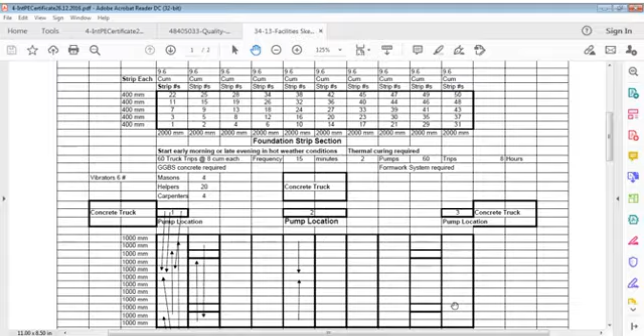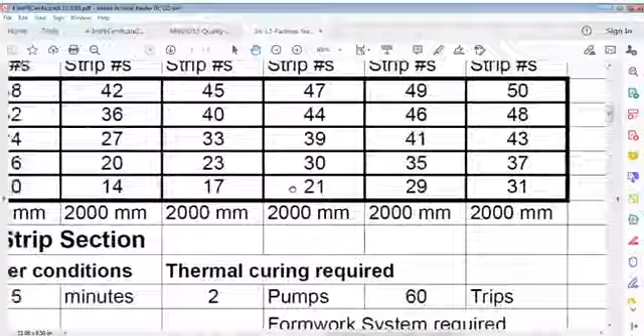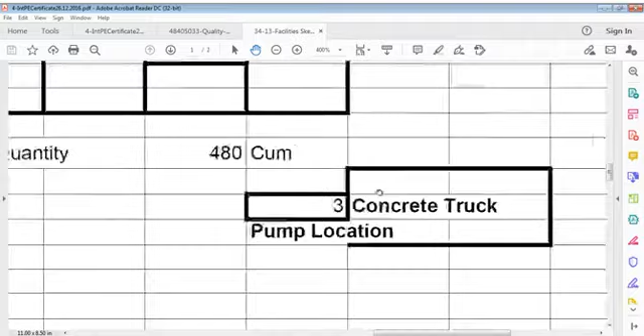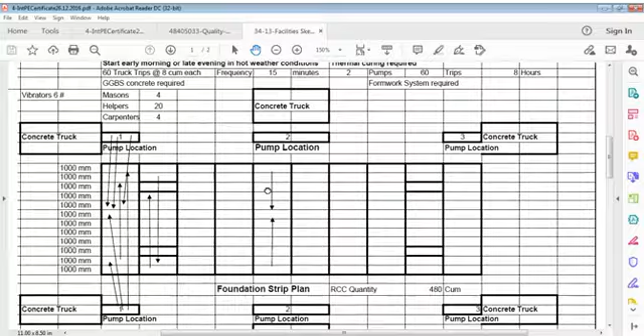Engineering is engineering. We cannot run away from that. Engineering means we have to move fast. We have to move fast with good planning, not only planning but good of everything. We have to deliver. We cannot take everything for granted. And civil engineering in particular is such a field where speed matters, and if speed matters, quality also matters.

This event or activity which is planned, that you are looking at, is only one activity, and that's part only. It is not even the complete foundation, but only the pour of the foundation. Not for formwork, not for steel fixing, not for something else. This proposal is just an indicator of how you can do it. It's just a guide, though it's based on complete thought, complete contemplation. Keeping in mind what's happening or would be happening on site, we evolve something like this, not only for this activity, for every such activity.

Thoughts are important. If you are experienced, thoughts are very important. In fact, thoughts become methods, and methods become technologies. Usually people call it methodology, but I do not call it methodology. I simply call such writing, such pages, such thoughts our own language, a language like drawing. We create such pages for everybody, provided one reads. And that's what engineering is all about: to learn to do it the best way.

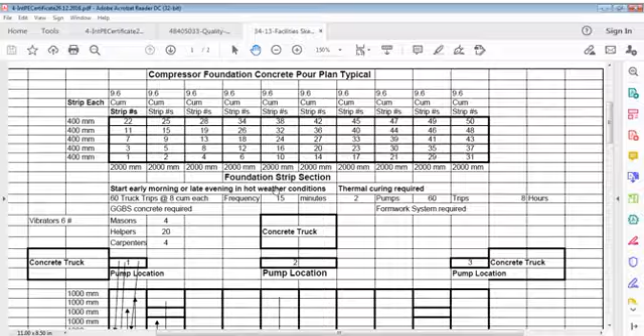Okay, we come back to this and we have to understand this well. A heavy foundation everywhere needs to be planned properly, because it is heavy concrete, sometimes many hundred cubic meters. I still remember a case where I poured a cracking gas compressor foundation, which was 400 cubic meters. 400 cubic meters is not a small quantity for one object, one element, or one machine.

How much heat does it give? Can you calculate? Can you even imagine what it evolves and what type of specifications we have to use in such foundations? That is a heavy machine foundation. Even in some building, you design a raft because of weak soil. You do not go to such an extent of foundation.

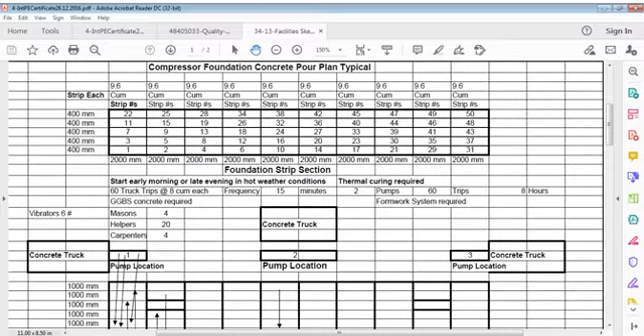I think it's still on, maybe. So I continue with this talk.

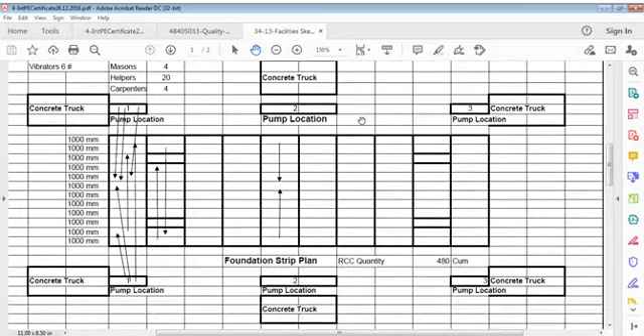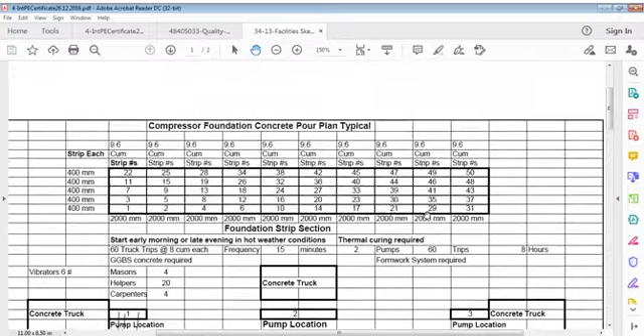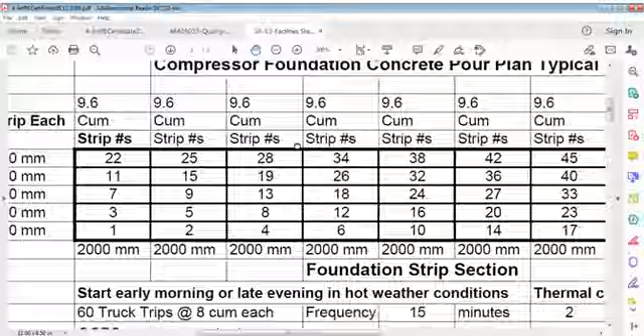This is a foundation. Don't worry about the title. This is a heavy foundation and it has about 480 cubic meters. It may look like much more, but it's a very small size. You can see here a 480 cubic meter foundation, and this is the plan for how to pour it. You can see only the pour plan, the concrete pour plan. This is the foundation concrete pour plan.

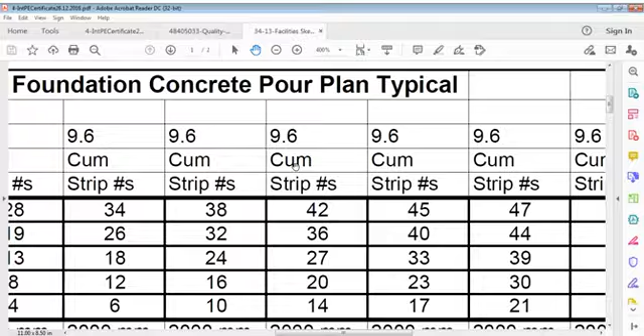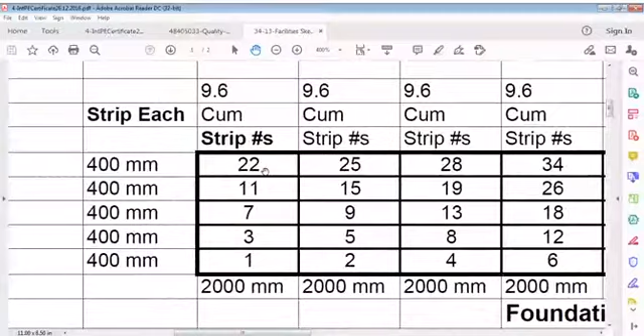It requires complete knowledge of how you can do it. It's not that you simply do it at random. You must have total vision of the procedure. If you don't have that, you can't plan it. If you don't have experience, you can't plan it. You see, quantities are approximately given. Thickness of strip is given, depth of foundation is given, strip width is given, and strip length is given.

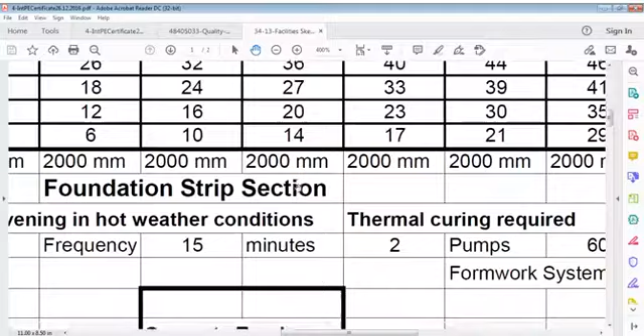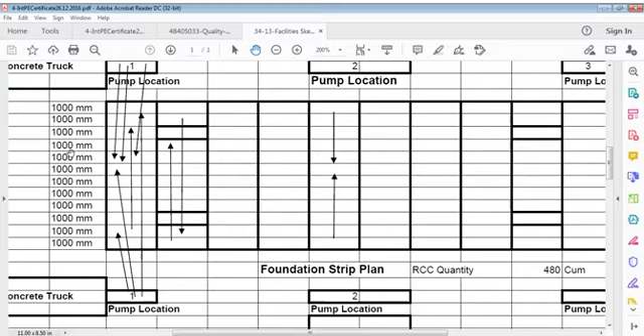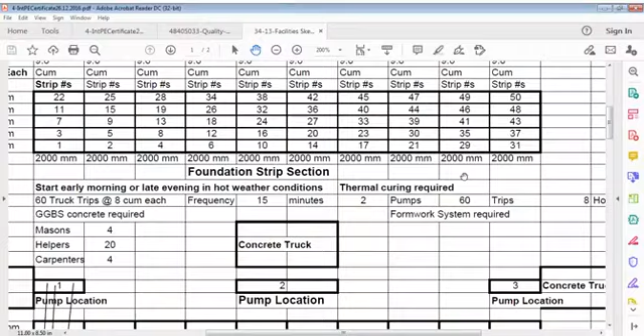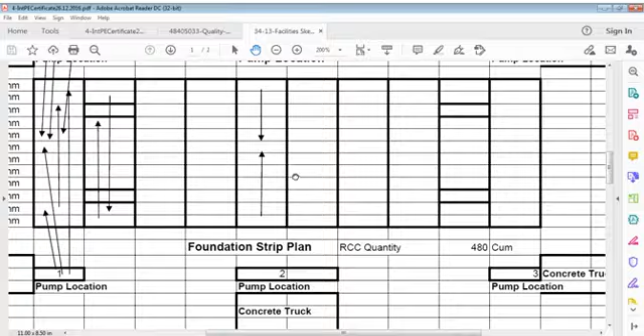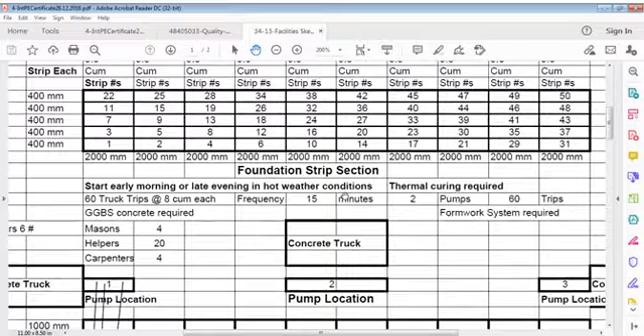It's not ordinary. It's neither an ordinary nor thin nor thick element, but it's massive. Believe me, it's not mass. Don't confuse yourself. I'm not talking of mass concrete. I'm talking of a massive block, a block which involves high quantity and high quality concrete. High quality in the sense that you're not going to use ordinary cement for this. Ordinary cement doesn't work for such a block, because there could be tremendous cracking, and because ordinary cement is rapid setting, it cannot be called qualitatively suitable for such a concrete quantity. This only gives the procedure, not the technicalities, but I'm sharing with you why it is done.

If you have experience in concrete and in construction of such foundations, like a raft foundation: if it's more than 1 meter thick, or more than 80 centimeters thick, we can say yes, it's actually a raft, a thick raft. The dimension is massive, but it's a machine foundation because the design is that way. It's not what we design for ordinary footings. It's a different kind, an extraordinary footing.

We have to control quantity, cement percentages, dimensions, speed, temperature, shrinkage, and curing. Hardly any provision or requirement is left uncontrolled, not only during pouring but also post-pour. In this case, because the quantity is much more than ordinary, I'll think of how to push it for a slow setting arrangement, not rapid setting.

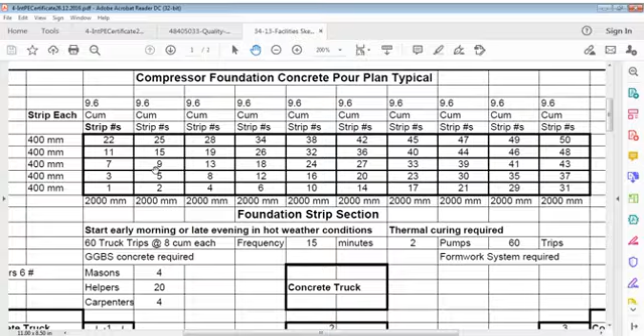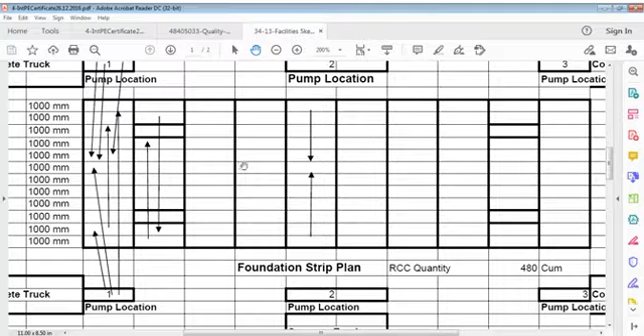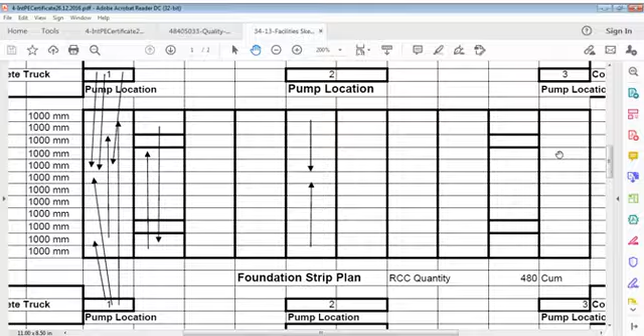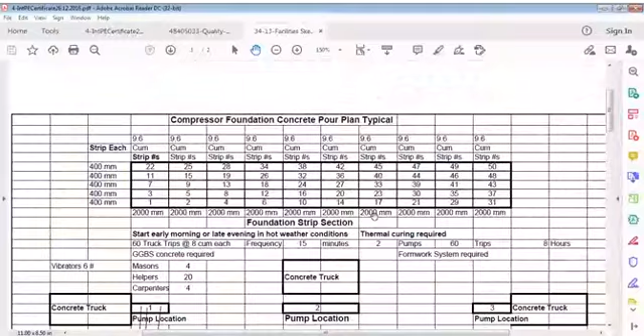The thickness, 400, 400, is also laying thickness, not element thickness. It's just a measurement for evaluation and planning purposes. If this foundation is 12 meters by 20 meters, all these strips are only for indication, not measurement. So if it is 10 parts here and 5 parts here, it's 50. That's what is important here, because of shutters, and this is where professional action is needed. Only for the purpose of the pour.

Not to allow any cold joint in various layers in concrete: cold joints do not work properly. They do not allow concrete to work properly. There is no good bonding within the concrete itself, and there is no uniformity. Some part is set, some part doesn't start setting, and other parts... that's complete confusion, maximum ambiguity. We have to take that out from our minds.

So this is what we plan, we do, we check, and we improve it. Layer by layer we go. It's just an indicator; you can change the sequences of these numbers. There's no hard and fast rule. But the rule is that every layer and following layer, and every other layer to come either horizontally or vertically with that layer, should be hot jointed layers, because in concrete cold joints cannot be accepted. Hot joints are actually more important.

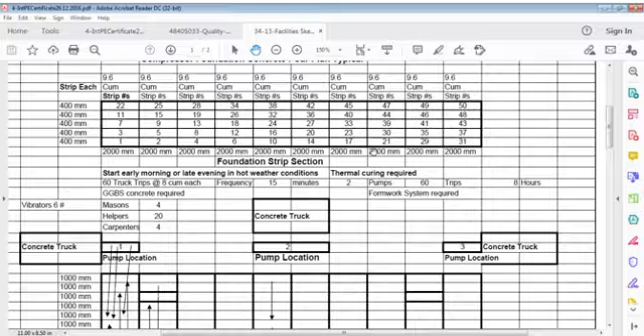For this, we have to schedule steps as well. So start early morning or late evening in hot weather conditions. Thermal curing required. So it says 60 trucks, trips of 8 cubic meters each. Frequency is 15 minutes, thermal curing is required, of course, and 2 pumps are required. 60 trips total.

This strip planning can be done for whatever foundations you have, not only massive blocks; you can do it for other items also. You have to show where pumps will be located, where trucks will stand, what your access to site is, and how strips shall be poured. You must be ready with answers if somebody raises a question. After all, this is public. Yes.

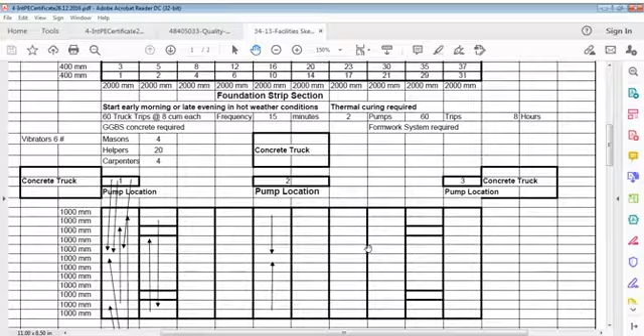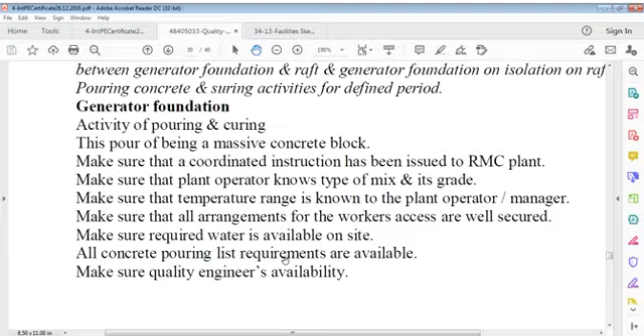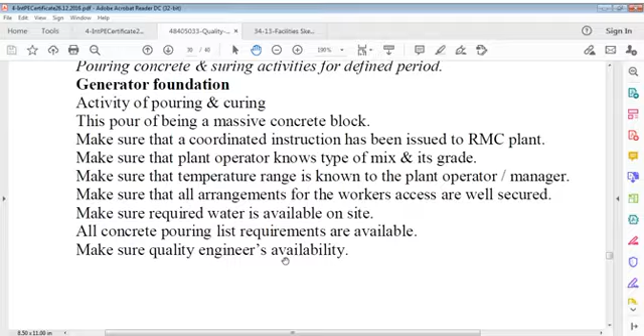So what we said in generator foundation, let us say generator foundation, we actually said this was something. It's an important activity of pouring and curing. So it says this pour being a massive concrete block, coordinate, make sure that coordinated instructions are being issued. All we have to do: temperatures, elements, etc. We have to go through that.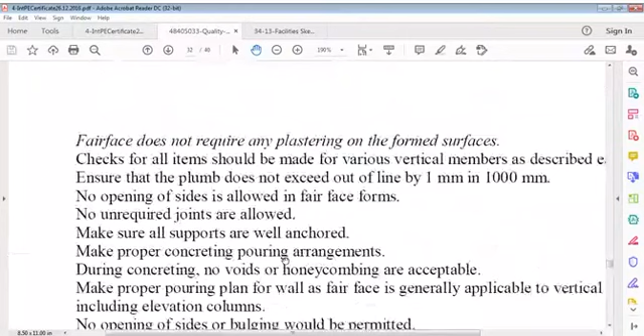Fair face concrete is also a very important part. Fair face concrete, all items should be made for various vertical members as described earlier, and ensure that plumb doesn't exceed; out of line is 1 millimeter in 1000 mm. No opening of sides allowed in fair face. No opening of sides allowed.

And you can say unrequired joints aren't allowed. Make sure all supports are well anchored. Make proper concreting pouring arrangements. During concreting, no voids or honeycombing are acceptable. This is a very important point, no voids also, because these voids can only do

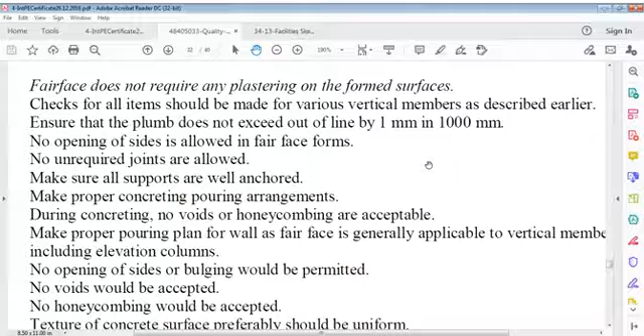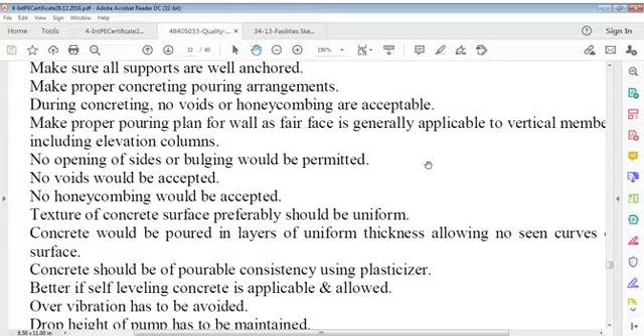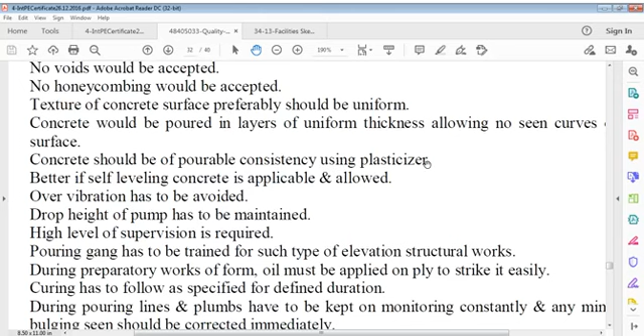You can say that concrete would be poured in layers of uniform thickness, allowing no seam on the surface. No honeycomb will be accepted in fair face. Concrete should be pourable consistency using plasticizer. Better if self-leveling concrete is applicable, although very expensive. Over-vibration has to be avoided. Drop height of pumps to be maintained.

Then a high level of supervision is required. The pouring gang has to be trained for such type of elevation structural works. During preparatory works, form oil must be applied on ply to... Now curing has to follow as specified, and during pouring the lines and plumb have to be kept monitored constantly, and bulging seen should be corrected immediately.

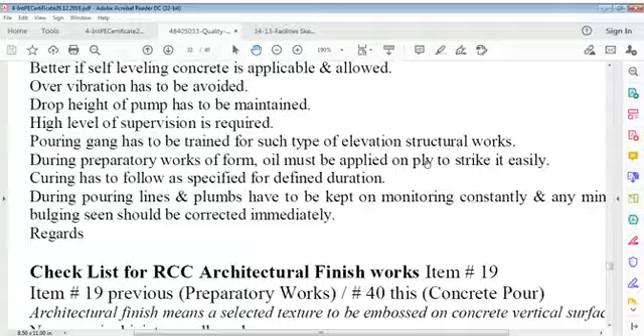So this is architectural finish, same except pattern on the surface of both side elevations. Some kind of architecture we have to do. The plank surface or some other surface. Generally planks are used because planks are rough, and made completely joint free; no leakage is accepted.

It's a difficult job, but what to do? I have to do it. Difficult or not difficult, we are supposed to do it, no way out. So these are quality

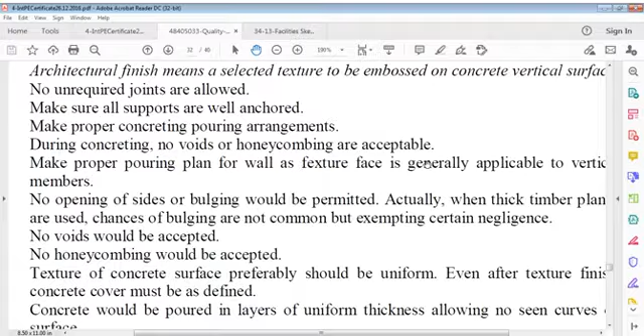hourdi slab, and before hourdi slab we might have these voids in block, different shapes of block, trapezoidal. As we discussed last time, of hourdi, this thing was also discussed. No, it is a completely different word here. We deal with hourdi. How do you call it? H-O-U-R-D-Y. Hourdy.

In this, beams exist that are seen and not seen. Soffit is one level, plain soffit, and plaster is there because of different materials. You see the hourdi surface, then you see plain surface. Hourdi block is rough, of course, it's a concrete block, and plastering is easy, formwork is easy, because there are no drop beams in this. When beams are formed in hourdi on the site itself,

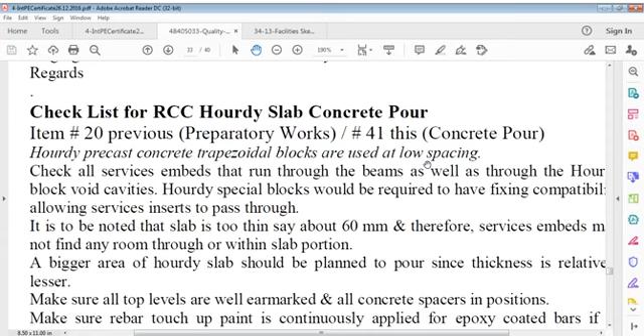Thickness of slab excluding this hourdy is 60 millimeters, 60 mm generally, maybe more, but this is very thin. In this we will place everything. It's to be noted that the slab is too thin, say 60 mm, therefore services embed in it.

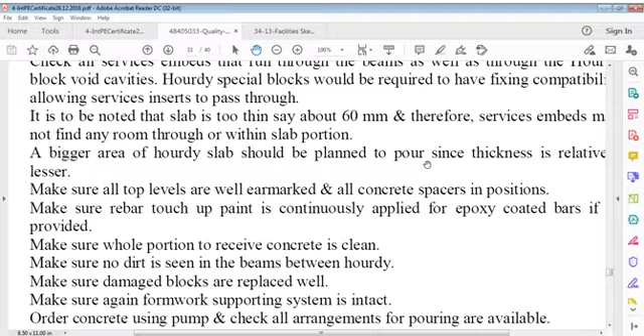You cannot find any room through or within the slab portion. The bigger area of the hourdy slab should be planned to pour since thickness is relatively lesser. All top levels are well earmarked and all concrete spacers in positions.

Rebar touch up paint is continuously applied, epoxy coated. The whole portion to receive concrete is clean. No dirt is seen in beams between hourdy. Damaged blocks are replaced well; you can't use damaged blocks in this.

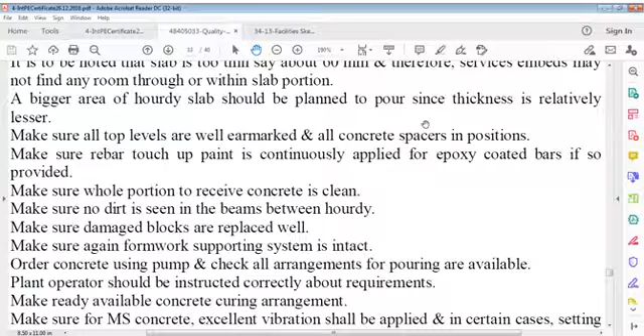Make sure again formwork supporting system is intact. Ordering concrete using pump, check all arrangements for pouring are available. The plant operator should be instructed correctly about requirements. Make ready available concrete curing arrangement.

For MS concrete, excellent vibration shall be applied. MS means microsilica concrete; excellent vibration shall be applied. In certain cases, setting time will start delayed by many hours.

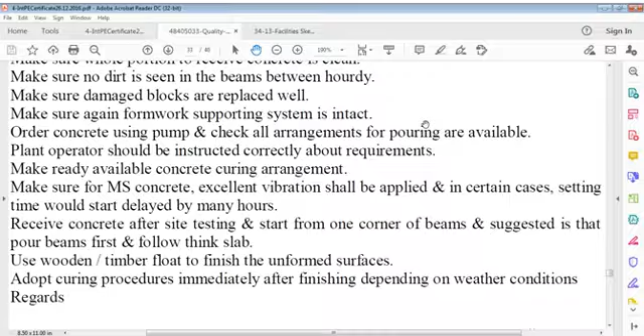Receive concrete after site testing and start from one corner of beams. It's suggested to pour beam first, followed by thin slab. Use wooden timber float to finish unformed surfaces. Adopt curing procedure immediately after finishing, depending on weather conditions.

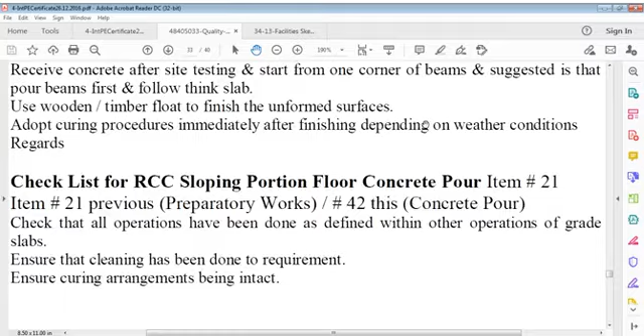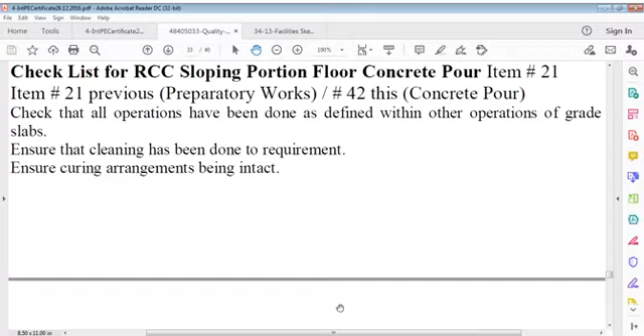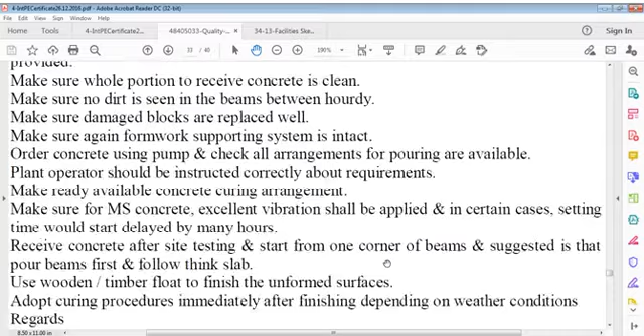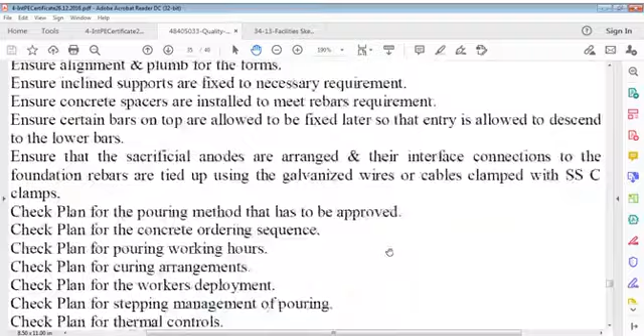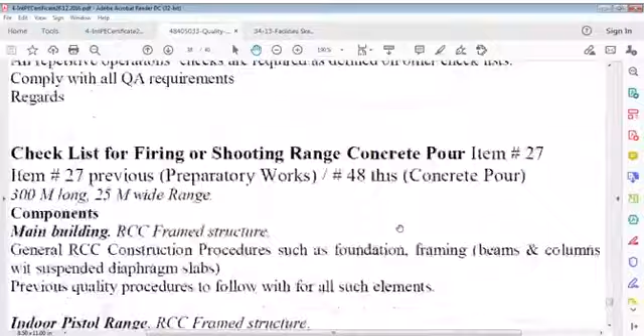Meanwhile, I'm going to close this now because it was thought of to do it faster, but my backing is not ready.

I should say pouring is a very important activity, because I've seen such rubbish pours. I've seen very bad posts, photos on Facebook and others. Really, sometimes you burn yourself looking at such results - results which are not digestible.

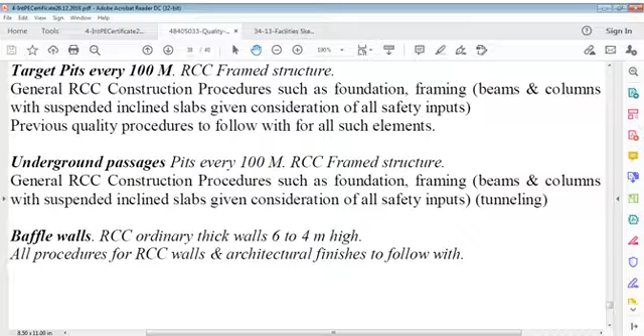As an engineer, you cannot digest such bad acts, bad works - not acceptable to anybody. It's not that I or you or someone else; you burn sometimes yourself seeing such acts. Really, that's worrisome.

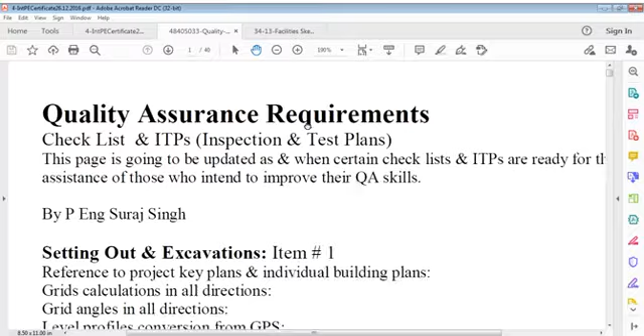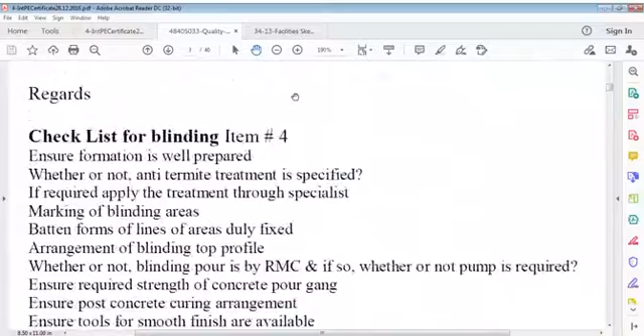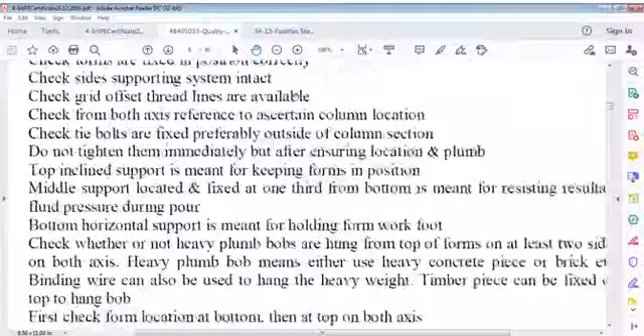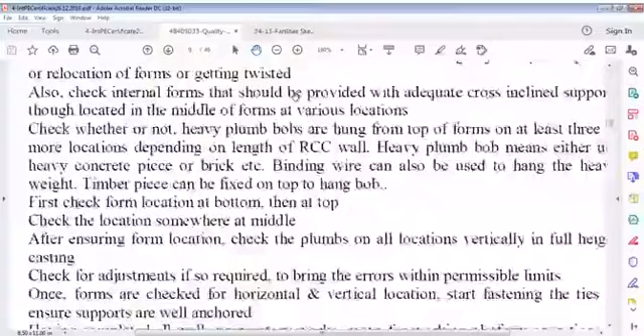It happens, but the only way is to improve. And if we can't improve, what can be said about that? If we can't improve, what to do? Improvement is improvement - if we don't improve, who shall improve? It's engineering work; only engineers should think how to improve quality so that designs are properly delivered.

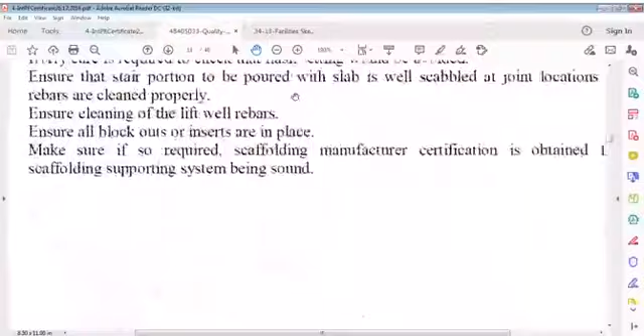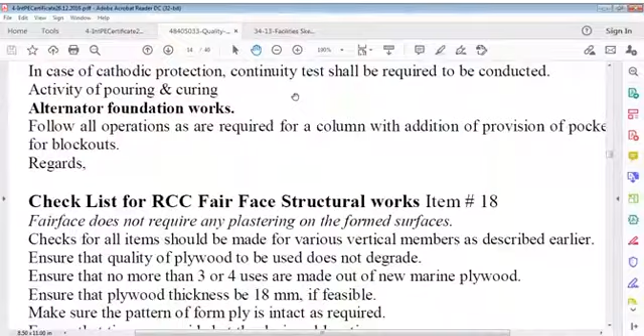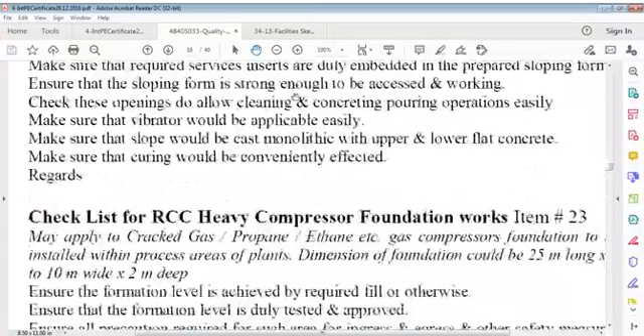And if you say no, I think that won't work - I have to be very clear about this issue. It's not an issue alone, it's a requirement, we can say. If we cannot meet such requirements, what are we in the field for? I would suggest field engineers be submissive to quality requirements and specifications, read them, understand them, and then only can we say we achieve something. Not only this method, all other methods and items must be taken care of, and if we do not, we cannot achieve our goal.